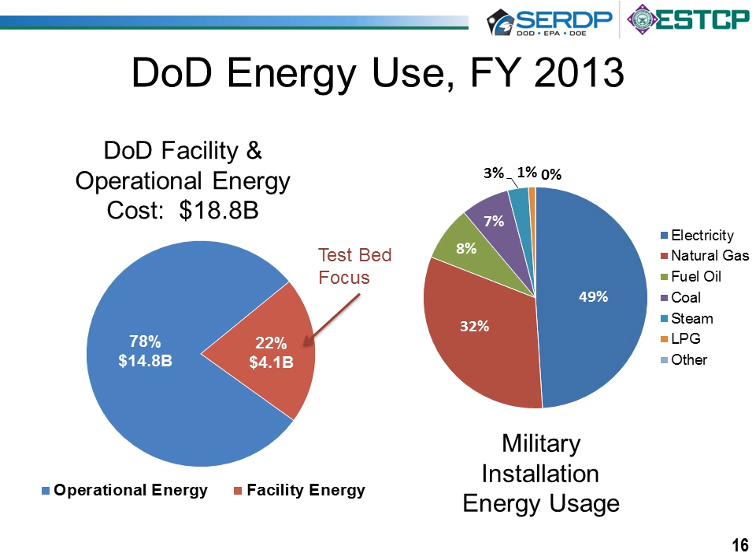So combined, that makes up about 90% of the overall energy consumed just via what we have for facility energy. And obviously, the more we can reduce those slices of pie, the more we can reduce the budget, and energy auditing is really going to be one of the best ways that we can try and take that on.

So why would we actually want to audit? Now, the ASHRAE procedures for commercial building energy audits say that the objectives are to identify and develop modifications that can reduce energy use and or the operating costs of buildings. So while those are relatively obvious for DoD, they are also applicable because of the Energy Independence and Security Act of 2007, which requires that every facility has to be audited at least once every 4 years, or really 25% of all covered spaces have to be audited annually.

And really the other reason is that just like any particular cost or profit center, energy really needs to be managed with the same emphasis that you would give anything else that is going to be a cost or profit, regardless of DoD or if it's going to be within private industry. So that's really something that we want to take a look at, and auditing really helps us put the best foot forward.

So really, what are some of the benefits of audits? For those of you who have been through this process previously, this may not be anything new, but for some who are new to the game, the biggest idea may be that energy auditing really gives you a list of no-cost adjustments that you can make to the facilities that you already have. So your equipment may be able to be tweaked slightly, or you can make slight adjustments to behaviors or how things are being run that really involve no capital costs whatsoever. And that can provide immediate benefits and immediate paybacks for you and your facilities team.

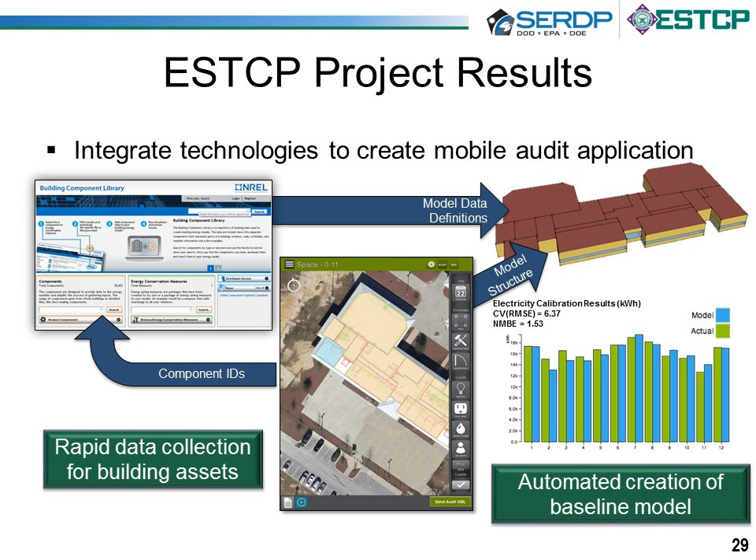As you complete that, you output and create an energy model, allowing you to calibrate the building and create a baseline, with geometry from all that you can build from. From there, you can do your life cycle analysis, identify your measures, and auto-generate a report.

So where we focused on saving money and time was heavily on the front end with data collection, but also on the back end with an automatically generated report, as well as the ability to customize that data as needed on a per-building and per-campus basis.

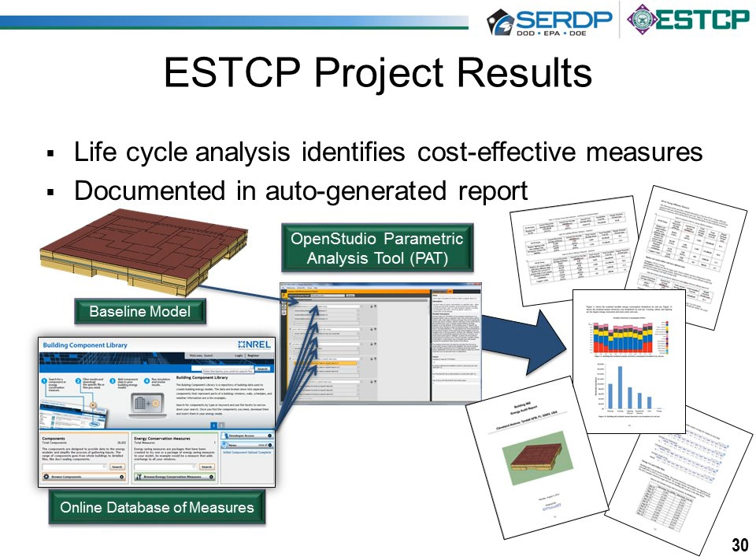We take that baseline model, associate different measures to it, calibrate it accordingly, and output a report specific to that building, then add more detail with various measures through the parametric analysis tool and the building component library.

These are some examples of different models we created at multiple sites, including NSAM, the Air Force Academy, Tyndall, and Fort Bliss, and these are just examples of the actual building models.

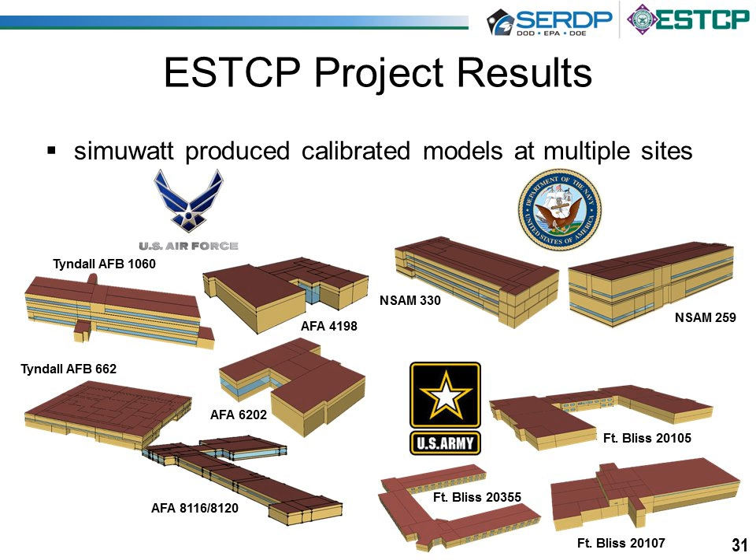So the NSAM building 330, here's the building where we actually did the control study. We started with a baseline, working with a Tier 1 ESCO and their current methodology, processes, and tools. We took a 75,000 square foot, 3-story building and looked at their current methodology and process with clipboard spreadsheets, then sending that information to an energy modeling group, comparing that against the SimuWatt workflow.

This building included multiple space types, and the benefits we saw were surveying and exporting the energy model in a very short period, without requiring the expertise required today. This ESCO and others we've worked with have noted that multiple parties typically have to be involved to do the work, from the front end all the way to the back end. We identified 5 measures with SimuWatt, with an average payback of 3.7 years and 10% energy consumption savings of $20,000 per year.

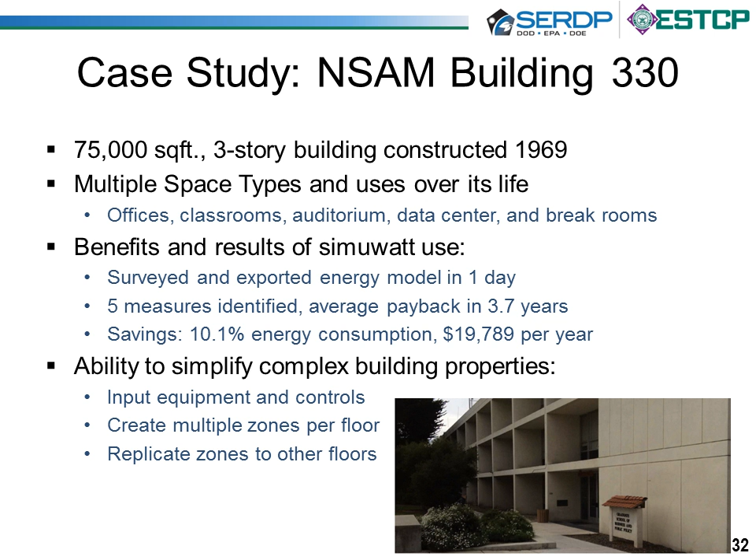With that, we have the ability to simplify these complex properties with input control. Within the application, you can draw out your systems, create multiple floors and zones per floor, so those can be specific per floor. Or if you have floors that are similar, you can copy and replicate each zone and floor, copying floor plans and information to speed up the process on a building-by-building basis.

As you look at simuwatt, we learned a lot through this experience. What we learned is that we can save significant time and cost by improving the quality of information, standardizing it, and creating geometry in the application for the client. We also recognized there's value in having other output types, so through this experience we've incorporated XML, CSV, Excel, and other formats to make the application even more flexible.

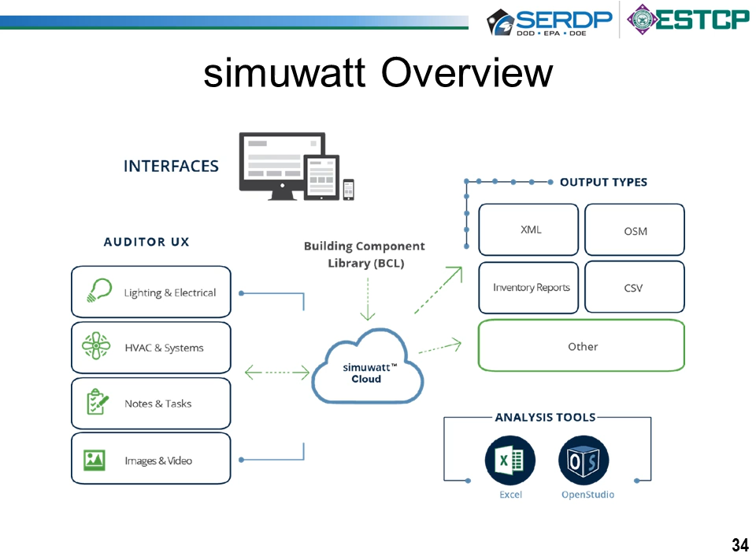Relevant to DoD is the savings, as mentioned, and compliance with EISA 2007 Section 432, which mandates a walkthrough and specific location-based data for agency buildings. All of this is referenceable and geo-specific, and can be reused down the road anytime, whether you're doing a retrofit, post-audit, or need the information for your next audit in four years.

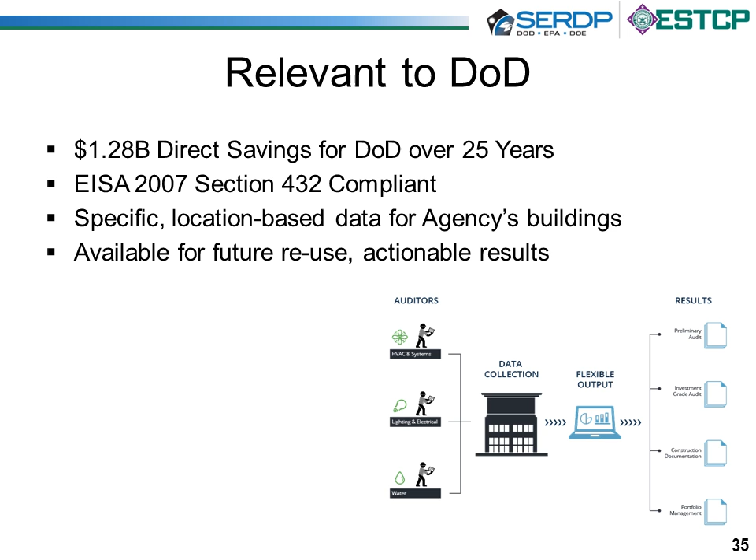Relevancy again is through a partnership with NREL. Simuwatt is a collaboration which incorporated great depth and know-how for energy audits, modeling, and processes. Simuwatt is included in an INL report for DOE in Q4 this year, and we have active inquiries from other agencies as well.

As noted, we can facilitate first-party audits at DoD. In conclusion, this is a collaboration as noted. Simuwatt provides a mobile application, will be web-based as well, with standardized data collection and reuse to help DoD meet their EISA 2007 requirements, with significant savings in audits using simuwatt, particularly for repeat audits. Thank you very much.

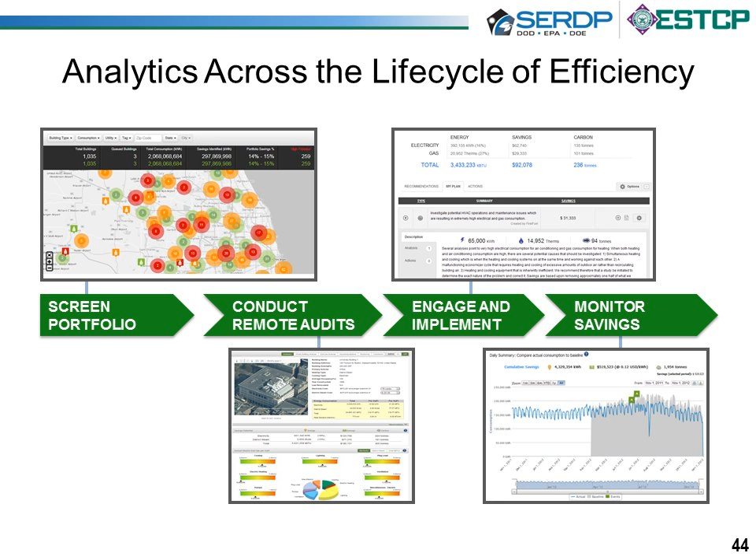Once we've delivered the results, we often work with the agencies and the building owners to implement those identified energy savings projects. Then, once the projects are completed, our service has the ability to continuously monitor ongoing energy consumption and savings in a weather normalized fashion. Weather normalized means that we're able to look at how the building is performing compared to that baseline audit period by taking weather out of the equation.

So one of the tools that I just talked about in that life cycle of energy efficiency was our remote audits, and that's the tool that we focus on for our ESTCP demonstration. Our audit solution allows us to work with the customer using minimal data inputs, such as weather data, the building's address, and its energy data, and then in this case, a building information survey.

Our analytics use these 4 inputs to come up with a breakdown of how the building is using energy and building-specific energy conservation recommendations. By using the building's actual energy data, we're able to make building-specific recommendations. So for example, we're able to see operational inefficiencies like uncontrolled heating that's happening during the winter, and capital inefficiencies such as older lighting that's been deployed in the building.

Our recommendations are targeted at getting that customer to act on what's happening in their building specifically, and we present the findings via a web conference as well as through online portal and PDF reports.

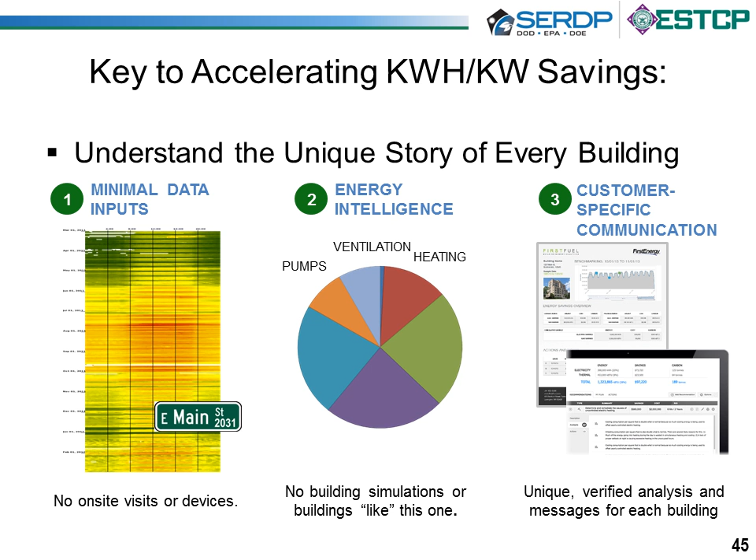Now diving a bit more into our ESTCP project. So FirstFuel started working with ESTCP back in the fall of 2011. We developed a demonstration that was aimed at helping the DoD overcome its challenges of identifying energy savings opportunity across its very vast and very diverse portfolio of buildings. Our demonstration focused on remote audits compared to on-site audits as a way to solve this problem.

In addition, we looked at the side-by-side remote audit versus on-site audit comparison and set up the demonstration to focus on a number of different building types that are unique to the DoD and on DoD sites that are scattered throughout the U.S. climate zones. We ended up choosing 11 sites.

We got the data for these 100 buildings across these 11 sites from the site's meter data management systems and ran the data through our analytics platform to determine the building's energy use profile and the detailed energy conservation measures, the process that I talked about on the last slide.

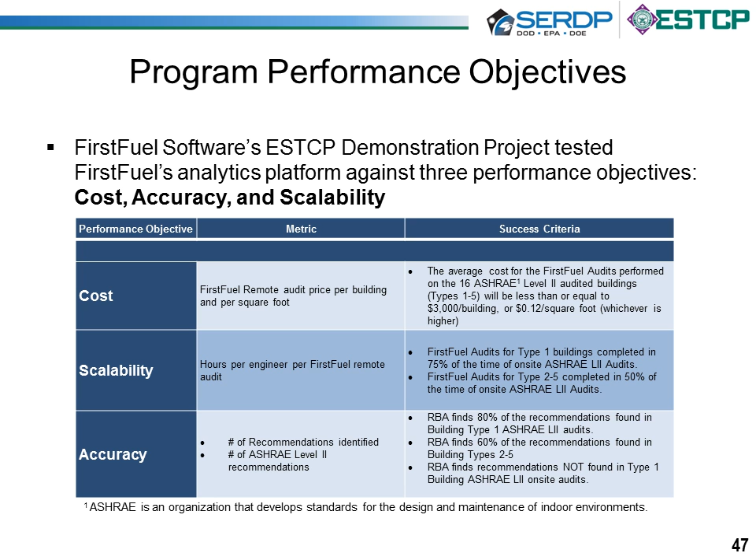Oops, sorry about that. So here's an overview of how our workflow played out with each of the DoD installations that partnered with us. Once FirstFuel collected the necessary data and completed the remote assessments, our building engineers presented the results to the site via a web conference. Each energy site manager was able to review the findings during the conference and provide feedback about the assessments during the calls. And at this time, we also showed them how to use the online portal.

Sites were then given access to the web portal so they could review the results on their own online, manage their portfolio of buildings, and track their measures. And then for those sites that had the ability to send us data after the audit, we offered remote monitoring, which again is our service that allows us to measure how their building's electricity consumption compares to the baseline period in a weather normalized fashion.

An important part of the demonstration, like I just mentioned, was comparing our audits to the on-site process. So while we conducted this workflow on the 100 remote audits, we also had a third party conducting on-site ASHRAE Level 2 audits on a subset of the facilities involved in our demonstration. The engineering firm walked the buildings and then prepared ASHRAE Level 2 audits.

And during this process, we learned that one of the big benefits of the remote approach is not only that our remotes can be completed more quickly than on-site audits, because we can do the remote audits concurrently, meaning we can do many buildings at once. On-site audits generally can't do that. They have to take full days to walk through just one building, and then they have to go back and prepare the written report. And there's also much less hassle involved for the remote audits because the energy site manager doesn't need to chaperone anyone on site for multiple days.

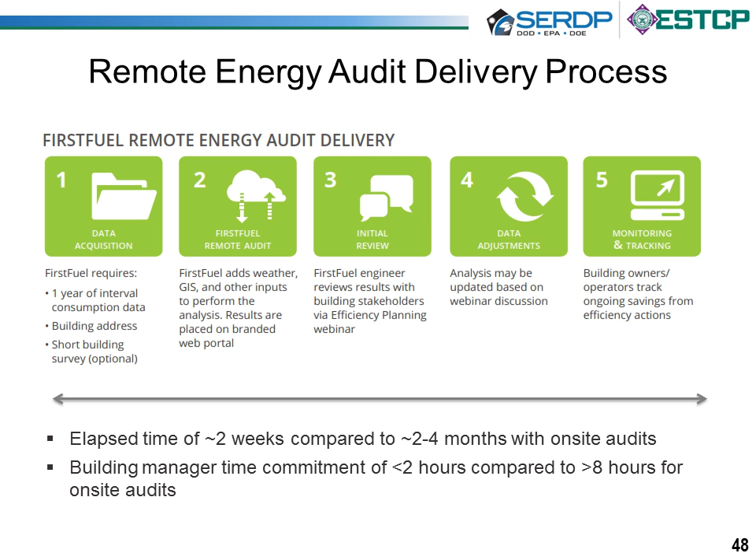Here I have an example of one of the types of data that we provide on our portal. We have an image of one of the views on our portfolio dashboard, and we're showing here 100 buildings that we looked at throughout the course of the demonstration. Each bubble represents a DoD building, and it is sized based on the annual kWh savings potential. So as you can see, we identified over 8 million kWh in savings, which equates to just over $800,000 across these 100 buildings. And each portfolio or site manager that we worked with had a similar view for their buildings at their installation.

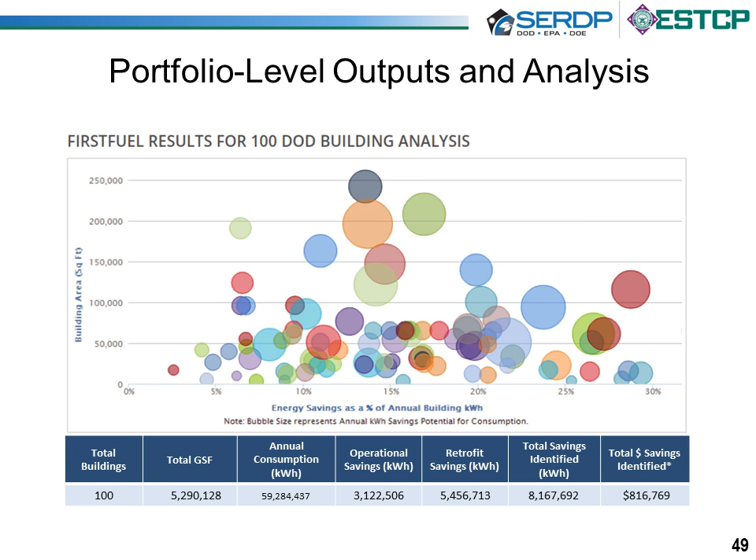And here's another way of looking at the savings that we identified across the portfolio. One of the key values that we've learned since we started these portfolio level deployments is that analytics-enabled energy efficiency provides a way to look at building savings opportunities to help with planning and targeting.

So what I mean is instead of having to manually extract key information out of each audit that's often in a PDF report and then come up with an Excel-based plan on your own, the Energy Site Manager is able to use analytics to approach this problem in an efficient manner. They can use these audits and the results as a roll-up to plan which buildings they want to go after first.

So for example, if I'm looking to get the most savings per square foot at my site, looking at this graph here on the right would tell me that I want to look more closely at my headquarters, which are the type 1 buildings, and my rec centers, which are the type 4 buildings.

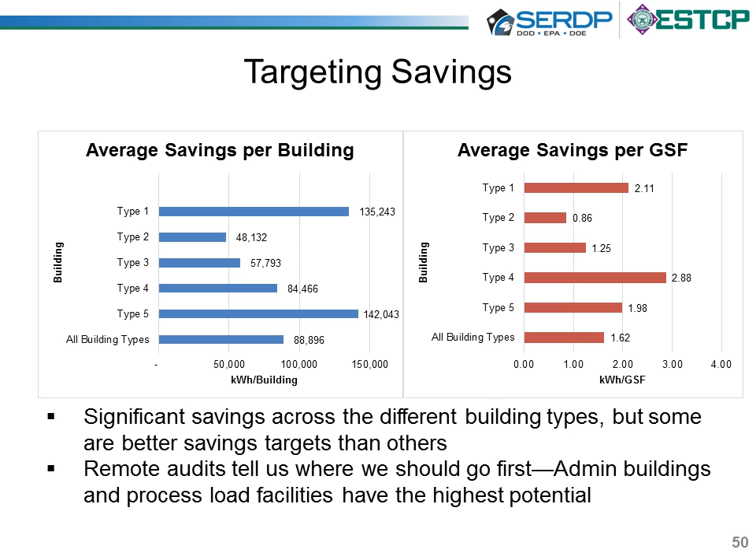Now that you have a sense of the portfolio level findings offered through analytics-enabled energy efficiency, I'm going to dig a bit deeper into one of our specific sites that we worked with, which is Fort Bliss. Fort Bliss was a great site for us to work with on our demonstration for a few reasons, and these are also reasons why I've chosen to talk about them in a bit more detail here.

One is that they have very aggressive goals for net zero energy, water, and waste by 2020. And piloting our remote audit service has been a way for them to identify concrete opportunities to reduce their energy usage and meet their net zero goal. They also have a wide range of building types, both that met our types goals and also represent a mix of new buildings and old buildings.

Additionally, many of their buildings have advanced meters that have been deployed for at least a year, which wasn't too common back when we started this for the other demonstration sites. Their site is spread across a huge area in Texas and New Mexico, making them in a climate zone that was rather new to us at the time of the demonstration.

Finally, their huge population offered a challenge that is very unique to the DoD and something we weren't used to before we started this demonstration, in that many of the buildings aren't always occupied throughout the year due to deployments or different purposes of the buildings.

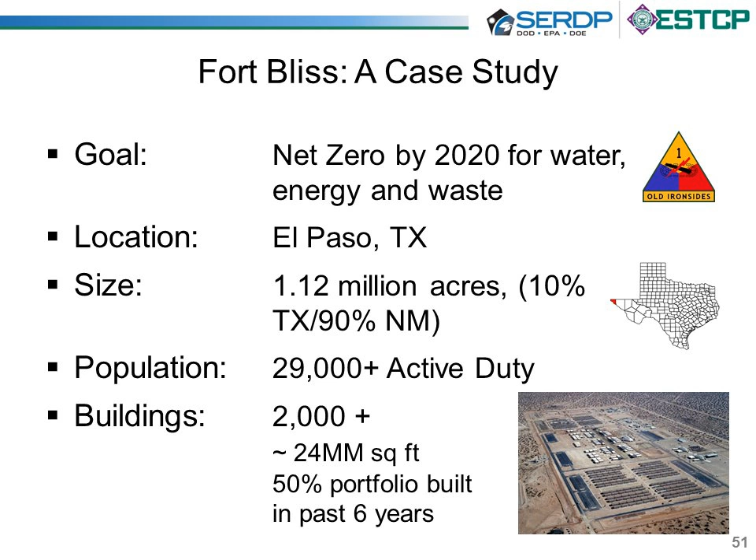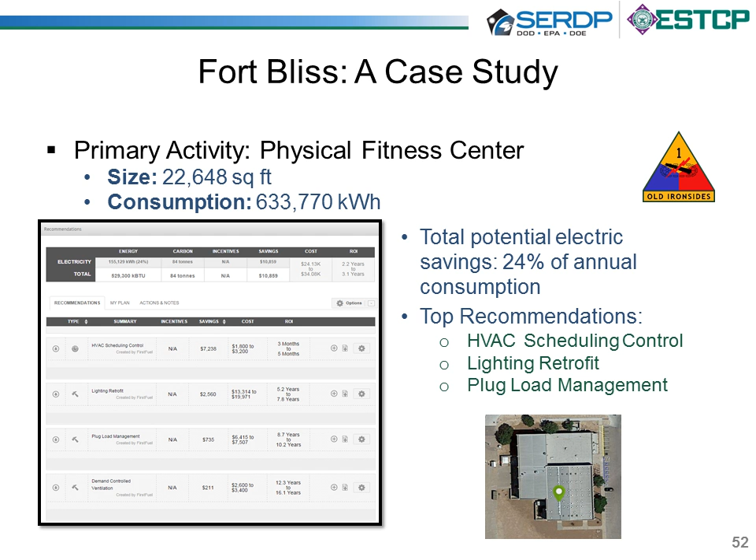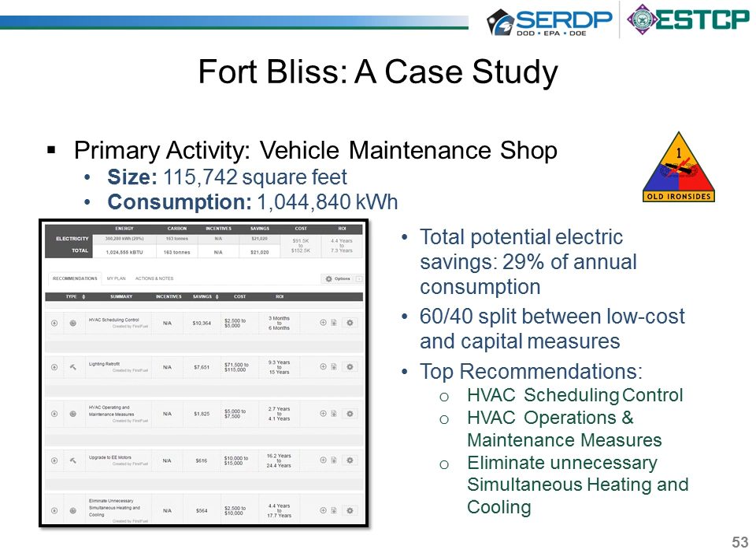When we started working with Fort Bliss, like many of the other sites we worked with, the energy site manager went into this with a healthy level of skepticism about what energy analytics could offer. He ended up finding that the analytics-enabled process found valuable cost and energy savings opportunities across most of the buildings. Also, that the recommendations were actionable in a way that he could use them for future planning as well as for the planning for the net zero goals since 2020 is quickly approaching.

Another point here that we found, and found on a few other sites as well, was the unexpected benefit of doing these audits using their advanced meter data. Before our demonstration, there had been little to no analysis of many of the buildings' advanced meters, and this valuable data was just sitting there without getting much value out of it. So our demonstration ended up adding significant value to that previously untouched data stream and also helped point out where there were opportunities to improve upon their metering system and data collection process.

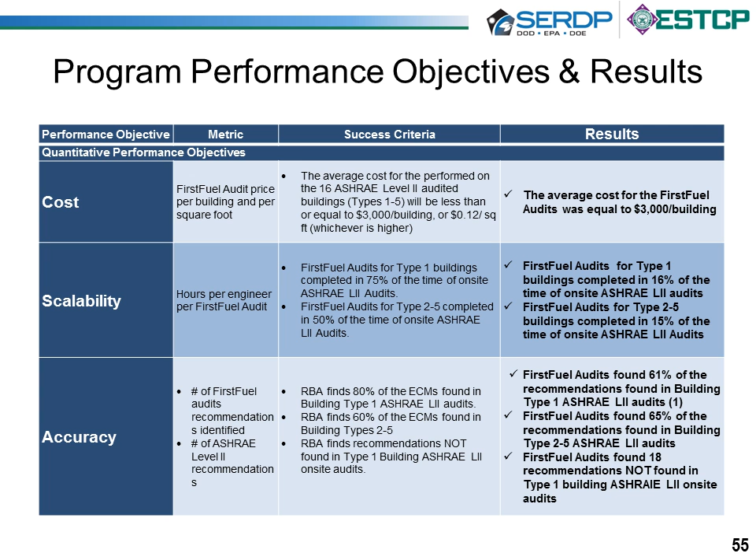And we also hit our goals for finding similar ECMs to the on-site audits in the building types that were new to us, so the barracks and warehouses and facilities with lighter process load buildings. Overall, we found that we met the good majority of our goals, and along the way we also learned some very valuable lessons about our process and how we can assist the DoD in meeting their energy goals with these remote audits.

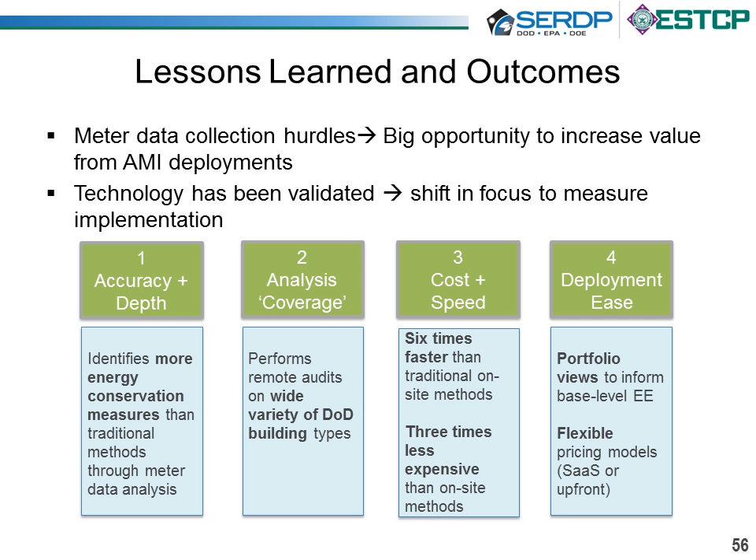In conclusion, our work with the DoD and our other customers has helped prove that analytics-enabled energy efficiency provides valuable, actionable information for parties interested in portfolio-level and building-level information. Using analytics to conduct energy audits offers a quicker and cheaper solution compared to the traditional on-site approach, while also identifying low-cost operational savings opportunities that help to achieve aggressive savings targets. We see great potential for analytics-enabled energy efficiency within DoD, and we're pleased that ESTCP does too.